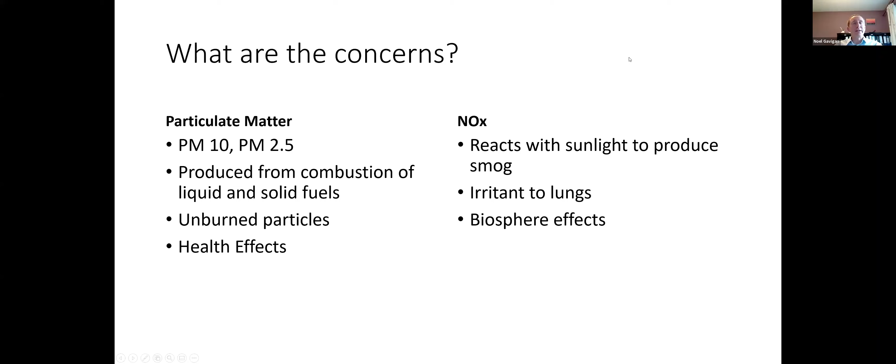About 2 years ago, this report was completed by the EPA, and I'll just go into some of the factors, some of the science behind this, some of the research that has been done on emissions so far. The EPA commissioned UCD to do a piece of work about 2 years ago. It was finished. It's a very interesting piece of work. It's very well put together.

Now, we would have a slight issue with that, and I'll go into that, or we have a predominant issue with that, in that wood wouldn't tend to burn very well in these types of stoves.

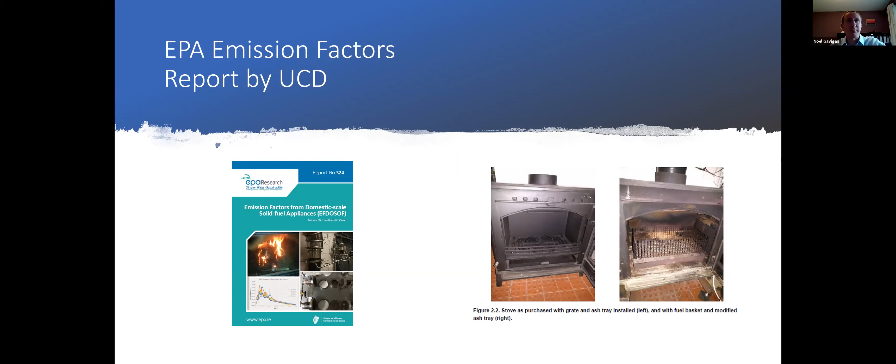But having said that, from a scientific point of view, the research was well carried out, and the stove type is quite similar to what many people would have. In that study, they compared turf, coal - different types including bituminous and other, dry and low smoke coal - dry firewood, wet firewood, and peat briquettes.

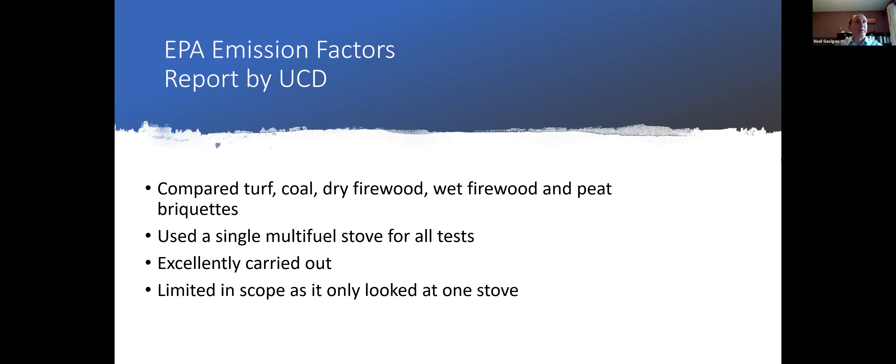As I said, they used a single multi-fuel stove for all tests. It was excellently done - the piece of research is very usable. It's something we can stand over, and it has added significantly to our knowledge in this area. We would, however, say it is limited in scope, as it only looked at one stove and one design of stove, and I'll outline later why that's important. So that would be the only limiting factor we'd see with that piece of research.

The results of that - this is the last slide I'm going to show you from that - but it's a comprehensive report. If this is an area you have strong interest in, I would advise you have a look at it.

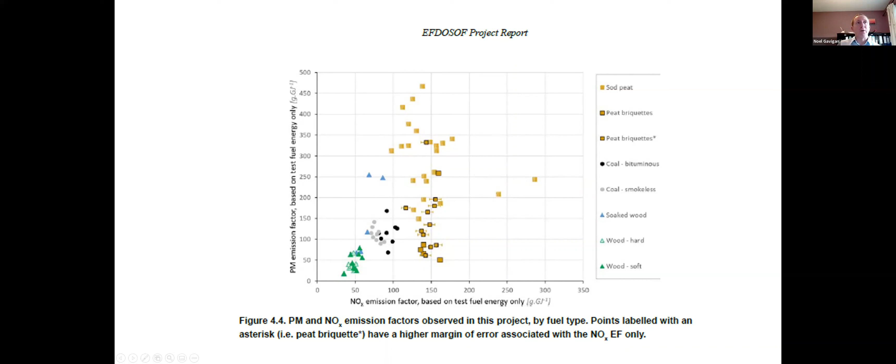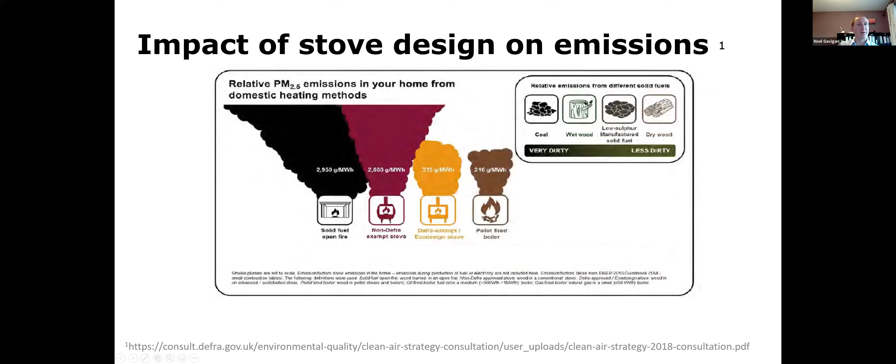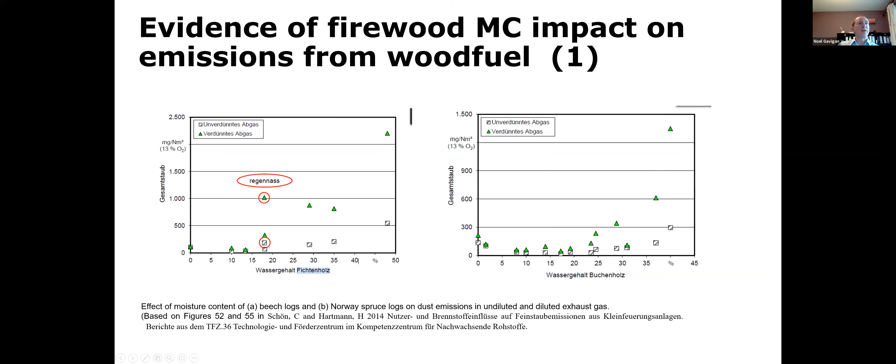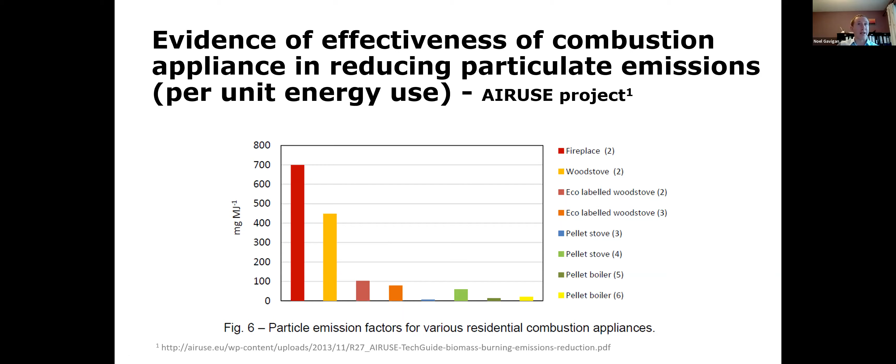The stove here, both of those come in at 100 and just under 100. Then a range of pellet stoves - there was one outlier which came in at around 60, and the other pellet stoves, two pellet boilers and one pellet stove, come in considerably lower again. You can see a dramatic impact because of the appliance that you're using, and that's the important thing. If you're going to burn a fuel, you have to understand how it burns and how to burn it correctly, and have an appliance designed based on that knowledge. By doing so, you can have a dramatic impact.

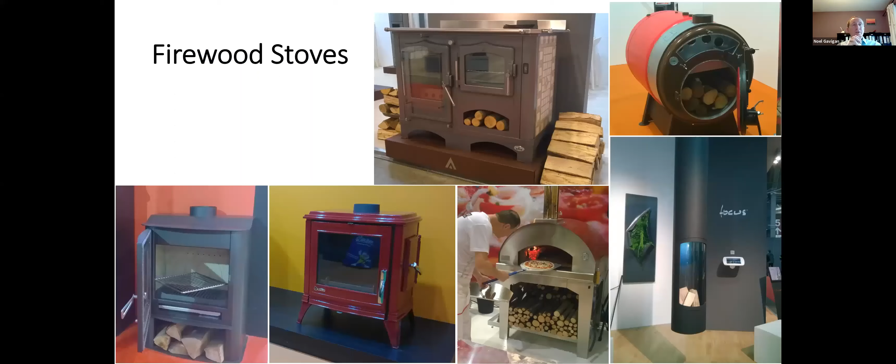The eco design, which I've discussed already, this is not just a label, it's an EU requirement. It is due to come into force in Ireland from the 1st of January 2022, that any stove for sale must be eco design. And the important factor to understand in this, and I'll go through how it works in the next 2 slides, but...

When we look at eco-design stoves, there is no longer going to be a multi-fuel stove. You cannot design a stove that can burn turf and also burn timber and have it eco-designed, or burn coal products and burn timber, because the two of them burn very differently.

It's a bit like a petrol and diesel engine. The technology is different, the way you combust them is different. And if you want the level of efficiency, and more importantly, the level of particulates reduced to the requirements, you cannot do that with any multi-fuel stove that's currently designed. So we really have to look at the eco-design label. To get that, you have to specialize your stove to burn one type of fuel. And it can be quite dramatic, the differences in them.

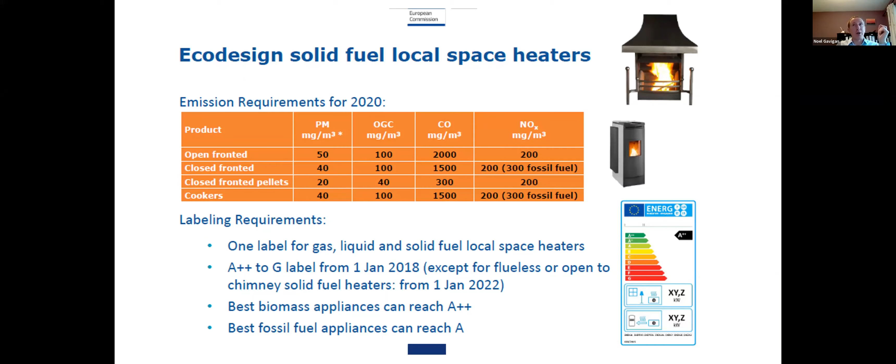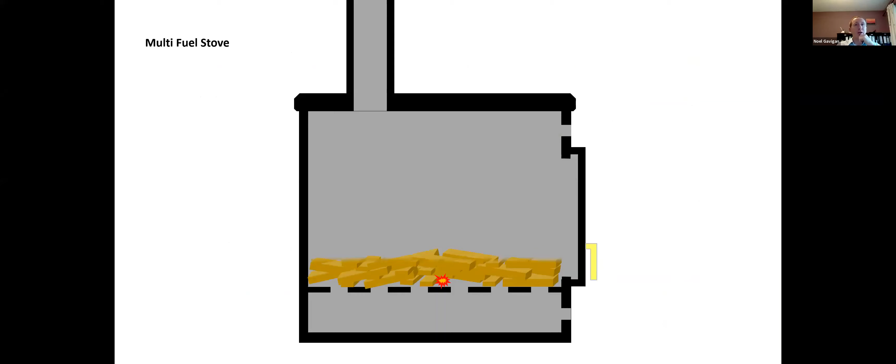Just to give you a quick run on the stove types. So a multi-fuel stove, we're all quite familiar with it, we've seen plenty of pictures of them. You tend to pile in your fuel, light the fire at the bottom and pile fuel in on top.

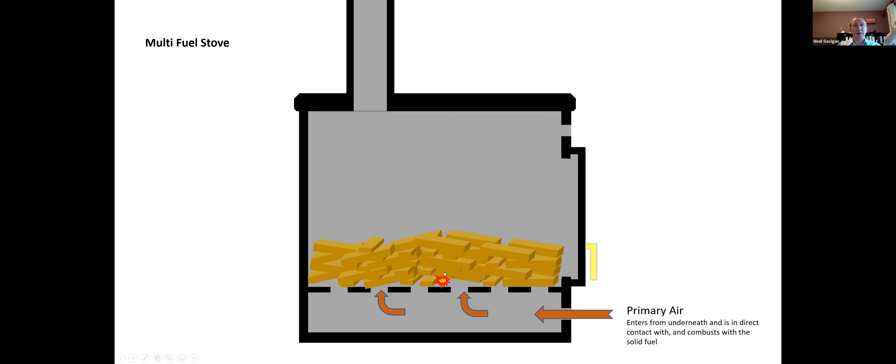We will have primary air coming in from underneath, and often people have these controls in the stove and don't understand what they're about. But primary air comes in from underneath, and it's in direct contact with the fuel and will cause combustion. You pile on your fuel on top and let it burn away, and your emissions go out the chimney. Secondary air comes in on top, and it mixes with the products of combustion.

Now, it is very important to understand the difference there, because when we're burning something like coal, it needs primary air because of the chemical makeup of it. It's more carbon than volatiles.

So you need a lot of primary air to burn coal, and very little secondary air. It doesn't have a lot of volatiles in it. Proper combustion needs that primary air, and you also tend to have a lot more ash from the likes of coal or peat, so you need a large ash pan.

In comparison, if you're burning wood fuel, the quantity of carbon is very low, and you'll see any of the main wood-only eco-design stoves that burn wood have no grate at the bottom. There'll be very little air coming from the bottom - they use all secondary air. That allows full combustion within the combustion zone, and allows much lower emissions as a result. So it's very important to know the difference and why those differences are there.

Just to give an idea of wood combustion, again you would use certified fuel, less than 25% moisture. Believe it or not, the way to combust wood fuel is actually to start the fire on top, and when it's dry enough it will burn down, and you get much better control of the emissions. You're not driving heat up through the fuel itself - it'll combust on top, and you're going to get much better combustion and much cleaner combustion.

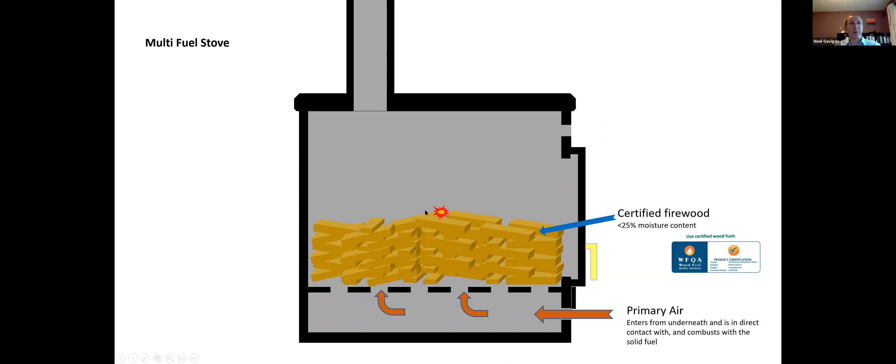So we'd recommend understanding the difference, and understanding that eco-design stoves, when they come in, will have a dramatic impact on that. Those stoves are already in the market, but they're a bit more expensive - a wood-only stove or an eco-design stove is an entirely different appliance. They are on the market, but will be required as of the 1st of January 2022. And again, we're obviously promoting regular maintenance to ensure they're correct.

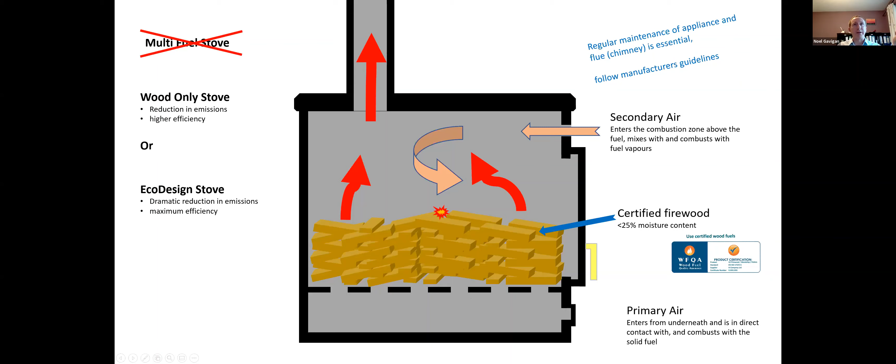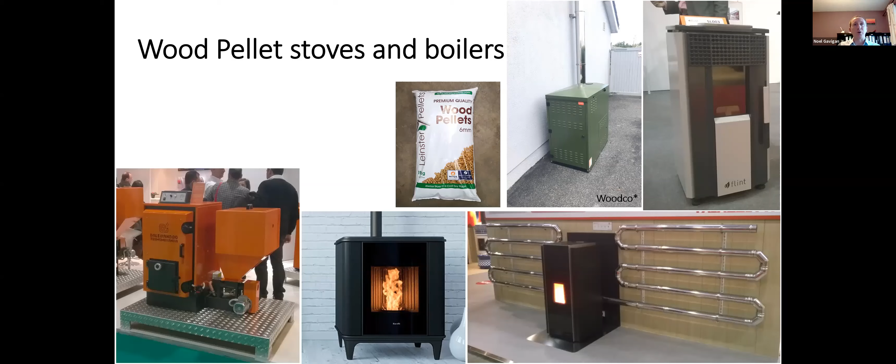To go on to what we're looking at here today, and going on to the current issue in terms of emissions and urban air controls - firewood that's been offered for sale in Ireland at the moment is absolutely atrocious in terms of what you can get in the market. It would not meet any standard. I'll go through a few pictures of some tests we've done.

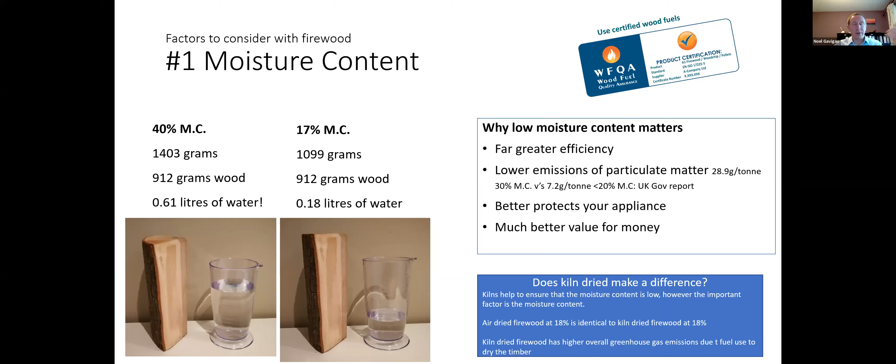We've got people around Ireland producing firewood at under 20%, just using air drying—literally just properly stacked outside—and it works very well. They're well prepared. They'll be starting to buy material now for next year, so they have the plan ahead.

So a critical component on all this is to use high quality firewood. I'll go into our proposal later on in a few minutes on this.

Our proposal is, just letting the slide catch up, that we've been approaching the Department of Environment for some time, which is all part of the environment at the moment, at this point in time. We are very strongly advocating that firewood needs to be regulated. You've seen the pictures of those samples of firewood outside shops in Ireland—they're not firewood, it's not fuel. So we are saying that firewood, like any other fuel, should be regulated.

We're calling for the regulation to come into force on the 1st of September this year. We're looking for the European standard ISO 17225 to be mandatory, and within that you have different phases for material to be at 25% or 20%. So we want to allow industry time to convert, to look at a mandatory level of 25% starting in September this year, and that's very achievable.

And to go for phase 2, so in the middle of the following heating season, we look at a mandatory requirement of 20%. By doing so, we're looking at reducing air emissions dramatically. That's on the fuel side, and that's our strong advocate at the moment. We need to look at proper regulation of wood fuel—like all other fuels, we need to have a standard in place.

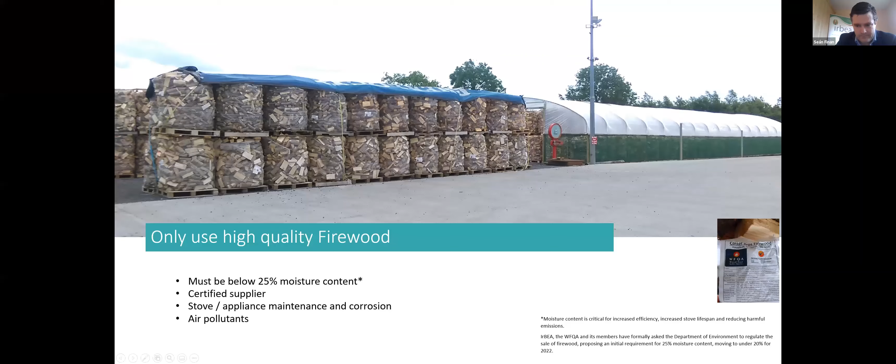Really, SEAI have promoted heat pumps, and they're a good technology. I suppose what they're looking at is if we can get to a situation in 15 years' time where we have a lot more renewable electricity on the grid, that level of emissions will be slowly lowered over time. So it is a factor to take into account. And look, if we're going to do all heat pumps and all electric cars, there's going to be a lot of pressure on the grid. There's a focus on electrifying everything. We would advocate that there is a need for all technologies to be brought into the mix here. We have a huge task ahead of us in replacing gas and kerosene. Fossil fuels have been very cheap and very plentiful, but as we know now, they're not good for us at all. But there's no silver bullet to replace them. We do need a mix of many technologies, and heat pumps, often coupled with high levels of insulation, will reduce emissions dramatically as well.

So look, they do have a place, a strong place, but when you're comparing them in terms of production per kilowatt hour, their emissions are a good bit higher. But there are other factors, and they are part of the mix.

And just as a follow-on from that, Noel, there are many houses that wouldn't be up to the insulation standards or the air tightness standards in terms of a heat pump. What are the potential solutions for those types of houses?

Yeah, it's something we're doing a heat plan on at the moment, which we hope to have published this quarter, between ourselves and Renewable Energy Ireland, which is a mix of all the different renewable technologies. It really is clearly showing the need for all these technologies.